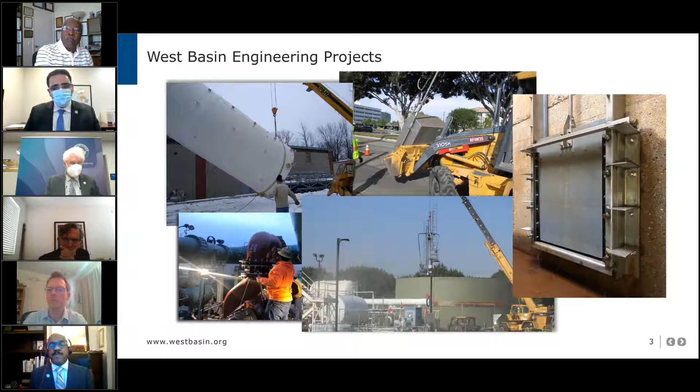Just to highlight and give recognition to some of the engineers here at West Basin, starting with our president of the board, Director Harold Williams. He's been an engineer in the Southern California area for well over 30 years. He's served various communities, is quite active in the professional engineering community, and also has a consultant engineering business at this time.

One of our newest members of the board is the chairman of this committee, Desi Alvarez. He has an impressive history - I've been fortunate to have worked with him in the past on some interagency boards we've worked on together. Mr. Alvarez not only graduated with honors as a civil engineer, but he did it twice, and he holds a degree in Masters of Engineering, as well as having a local consultant engineering firm.

Our executive manager of engineering and operations is Barkev. He also has a master's in engineering from Cal State Long Beach.

Myself, I've been in engineering quite a long time. I think it probably started when I got a note sent home from my elementary school to my parents saying I was daydreaming. I really wasn't daydreaming, but I was watching them build my middle school outside the window. So I've had a long standing interest in engineering and construction of that type.

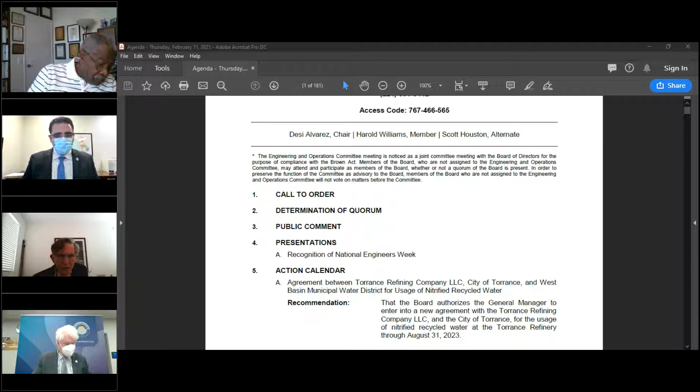Thank you. Okay, if there's no other comments on that, let's move on to the action calendar. For consideration today is the agreement between the Torrance Refinery, City of Torrance, and the West Basin Water District for usage of nitrified recycled water. So General Manager, who's going to be making that presentation? Will that be you?

Let me, Director Alvarez, Chairman Alvarez, let me introduce it, and then I'll have Barkev do a presentation. I believe we have a PowerPoint on this. So by way of background, this agreement is a three-way agreement between the Torrance Refinery, West Basin, and the City of Torrance, although the refinery and West Basin are the principal parties. It's for the provision of recycled water, nitrified water, we call it, which is recycled water with the ammonia removed that they use in their cooling towers. Our relationship and this agreement started way back in 1995 and expired last July, and it's been extended by the board through the end of this month to allow for negotiations for a new agreement.

I also mention we have another agreement with the Torrance Refinery and the city for the provision of boiler feed water, which is another type of recycled water, a different quality, a different spec for use, as the name implies, in the boilers. This one, though, is for the nitrified water, the nitrified recycled water.

What we're going to talk about today is we have two agreements, entered into at different times. All of the refineries we currently do business with, Marathon, Chevron, and Torrance, first trusted in the nitrified cooling tower water. That was the low-hanging fruit back in the 90s. After a few years, once they gained confidence in the quality and reliability, they moved to boiler feed. All three now get boiler feed water, which required a new separate plant built 2 to 4 years after the original nitrified agreements, depending on the refinery.

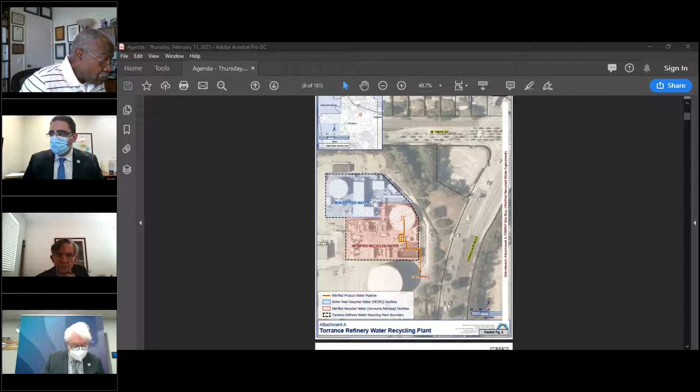This is what we call our Torrance satellite plant. It has two components, the nitrified water and the boiler feed. In the nitrified water agreement, the principles set back in 1994 mention there's a commodity and a fixed component. The fixed component was to pay for construction of this facility over 20 plus years, which expired, and they paid their last payment in July. The agreement, although not entirely clear, and that's why Steve, the attorneys, and myself have been looking at this, is that at the end of the agreement, the ownership of the infrastructure could inure over to the refinery since they already own the land.

And that's what we're going to be discussing. The next logical question is what would that mean for us? Let's say after mediation the ruling was that they did actually own the infrastructure. It would bring up further discussion about who and how it might be operated. I think nothing would change during the course of this agreement based on what I'm hearing from the Torrance Refinery folks, but maybe in a longer term agreement they might revisit the operation of that facility, or they might continue the way it's going today. So, hopefully that answers your question about ownership, what we're talking about is the infrastructure, not the land.

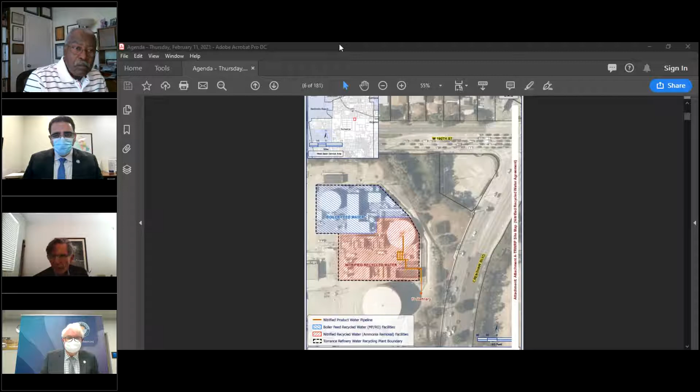For right now, I may follow up with you later. There's a couple of things you raised, but they're minor points. Just for clarification, 100% of the water treated here is used at the Torrance Refinery. We basically use this asset to produce water for the Torrance Refinery. Water produced at this plant is not used anywhere else in the system. Nowhere else. Okay.

I'd like to get a little more feedback on this full cost recovery. On the issue of the variable rate, just the raw rate for the water, I know we're going to charge on a 3-year rolling average. What is the current cost to produce the water? Not the average of the last 3 years, but what's the current cost? Well, the current cost is very close to what is in this agreement. The 2021 rate was based on the preceding 3 actuals.

I would say that's 18-19, 19-20, 17-18, 18-19, and 19-20, and those are actuals for power, labor, chemicals, maintenance, everything. By doing the 3-year rolling average, you have a fairly close figure to actual costs incurred, and that is used as the basis for setting the rate for the next year. Our current costs are very close, sometimes lower or a little higher, but it'll be very close to $1,000 an acre foot, unless there's a huge change in the cost of power or labor, which we don't see since we've been running this for quite some time.

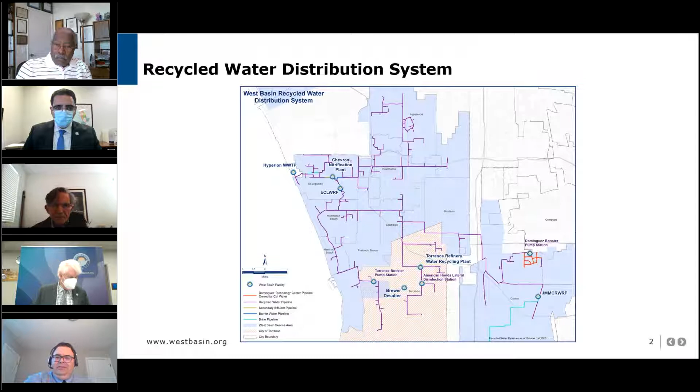If I can interrupt for a point of clarification - those pipelines you just mentioned are currently owned by Cal Water, is that correct? That's correct, Director. It's just that little red section referred to as the Dominguez Technology Center. So it's just the one on the southeast end? Yes, just those pipelines in red. So those are owned by Cal Water and would not be part of the operations or maintenance agreement. Cal Water would retain responsibility for the maintenance of them since they own them. That is correct. Okay, thank you. Go ahead, apologize for the interruption. Oh, no problem.

So continuing with the overview of the distribution system: overall, the district owns and operates 103 miles of pipelines. The majority of those pipelines convey tertiary treated, disinfected water. But I also want to highlight that the district owns pipelines which convey brine and secondary effluent - that's the 60-inch force main that supplies secondary water from Hyperion to the Edward C. Little Water Recycling Facility. We also have pipelines which convey barrier water, nitrified water, and single-pass and double-pass reverse osmosis water.

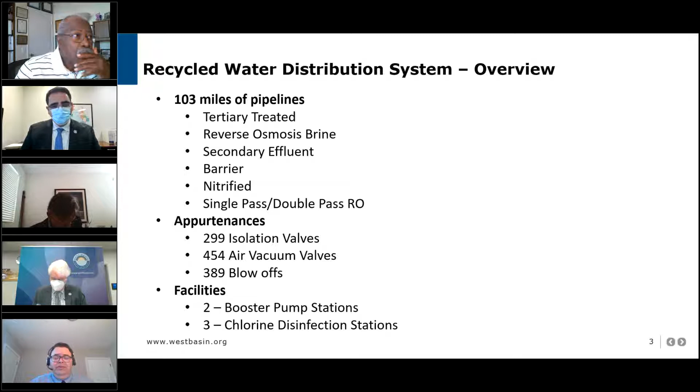We also have approximately 300 isolation valves and 454 air vacuum valves. Air vacuum valves are mechanical devices connected to the high points of the distribution system, used to release accumulated air at those high points and to allow air back into the system if there's a sudden change in pressure. In addition, we have 389 blow-offs, located at the ends of the system and at low points, to flush or drain water if needed. As highlighted in the map, the district also has 2 booster pump stations and 3 chlorine disinfection stations, 2 of which are located at the booster pump stations.

So I just wanted to first go through the distribution system now. I'd like to provide a brief overview of the scope of work, which is attached as part of this memo. The scope of work is what potential contractors would use to identify the work we're requesting as part of this solicitation, and that would be attached to the overall request for proposals. I've divided the operations and maintenance into basic services and emergency services to summarize the overall scope of work.

Under basic services, we would request the contractors to provide distribution surveillance. So we would want an operator, on a scheduled basis, to go throughout the distribution system and check for leaks or identify if there's any damaged or missing equipment throughout the distribution system.

We would also want them to conduct water quality sampling on a scheduled basis. We have 30 different locations throughout the distribution system that we currently collect water samples at.

We would also want the contractor to operate and maintain the appurtenances that I had mentioned. For example, the isolation valves, we would want exercised, which entails opening and closing valves to extend the life of those valves and ensure they work when needed. There's also maintenance associated with air vacuum valves as well as the blow-offs. Of course, we would need operations and maintenance support for the pump and disinfection stations that I highlighted before.

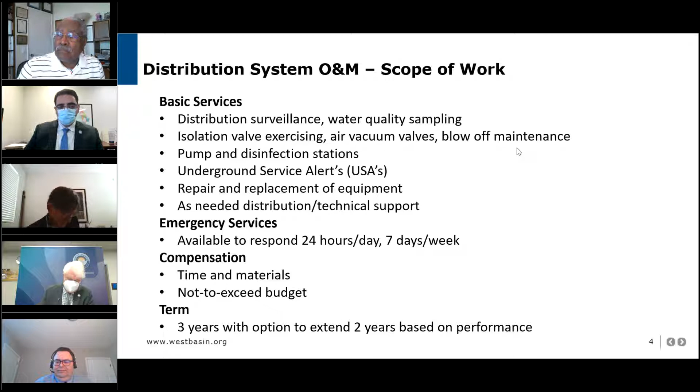Okay, I guess this is just some generic questions for the general manager. There are some fairly straightforward items in the scope of work, and I was just wondering - maybe we've got an operations department and operations staff, you might want to comment. We have a very limited number of meters.

Why can't some of those activities not be done by our operations department? So the specific question, Chairman Alvarez, is that we have a limited number of meters. When we say a limited number of meters, why can that not be done by our own staff in terms of the calibration?

First, before I go back to Frank on this - for instance, our main mag meter going to DWP, any calibration for that, I'm sure, is outsourced to a company that specializes in calibration of meters that size. And on the other ones, I assume you're talking, Chairman Alvarez, about calibration or more than just calibration of the meters?

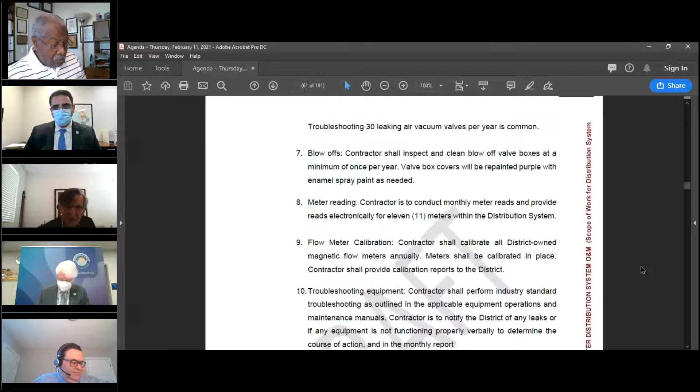Well, on page 81, meter readings - there are only 11 meters. Reading meters is pretty straightforward. I'm just, at some point, if you're looking at just kind of metrics and so on, and maybe it's a greater point, but we've got an operations staff, and some of these things are stuff that maybe our staff should be doing.

The meter calibration, that's contracted out, and there are people who just come in and calibrate meters when that's needed. But things like meter readings, water quality sampling - those kinds of activities might be something that we should be looking at our staff to do.

Okay, so what we can do for that, Chairman Alvarez, is Frank, you don't have to get this right now, but how many meter reads are we talking and how frequently? I assume they're all monthly. And then the other part of this, the same with the water sampling. I think you have a matrix for this. How often and where are they at in terms of sampling, and where are these reads at in terms of distance? What's involved in that time-wise, and then delivering the samples to where they're to be analyzed, or some of them are field analyzed, I take it too, for chlorine residual. So unless you have it off the top of your head, can you just comment?

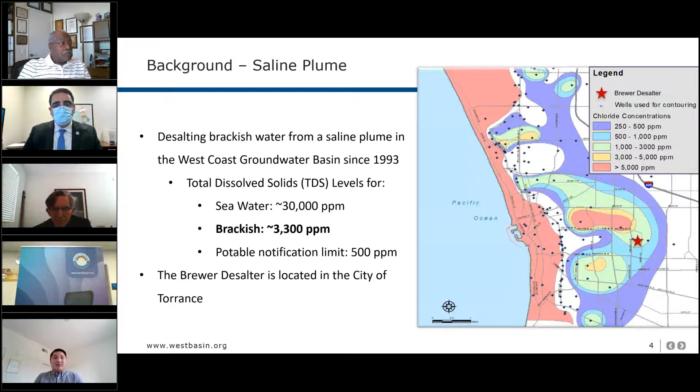We're currently granted pumping rights up to 2,000 acre feet per year by the LA County Superior Court back in 1992, and that's about 1.78 million gallons per day. Back in 1986, there was a large drought, and Metropolitan ordered its member agencies to really reduce consumption of imported water. West Basin was expected to reduce supplemental or imported water deliveries by 20% to meet this reduction.

So the district instituted a broad water conservation program, including new water development. This demonstration project was a major component of the district's program, resulting from several studies commissioned by West Basin which identified underutilized local sources of water supply. That was back in 1986.

Operation began 27 years ago, almost 28, in July 1993 as a 5-year pilot program, as Patrick previously mentioned, to evaluate this desalting technology. We're currently operated by California Water Service. As mentioned, it's brackish water desalted with reverse osmosis technology and blended with another potable water source in that 5 million gallon storage tank to the right. Since 2002, we've removed about 48,000 tons of salt - quite a lot.

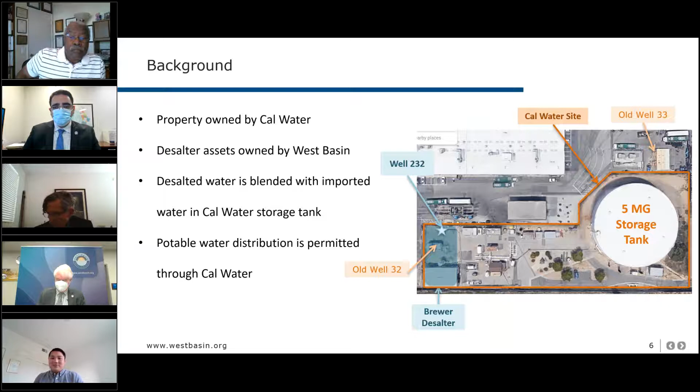Let's go into a little chronological background. Going back to 1993, we originally had 2 wells belonging to Cal Water, located on the left of the map, Old Well 32, and another on the top right, Old Well 33. That was 2 wells with a combined capacity of 1,250 gallons per minute.

In 2005, we constructed Well 232, the light blue star in the shaded rectangle, to replace the 2 existing wells, at a capacity of 1,250 to 1,500 GPM. In 2014, we replaced the stage 1 and stage 2 reverse osmosis membranes, about 252 membranes in total. After that, the well capacity was reduced due to the health of the well.

That triggered a well assessment, completed in 2016, which identified that a mechanical and chemical rehabilitation of the well was needed. That was completed in 2019, along with upgrading the well motor and pump to a 1,400 GPM capacity. More recently, in 2020, we replaced 84 membranes, about 33% of the total number, of stage 2 reverse osmosis membranes.

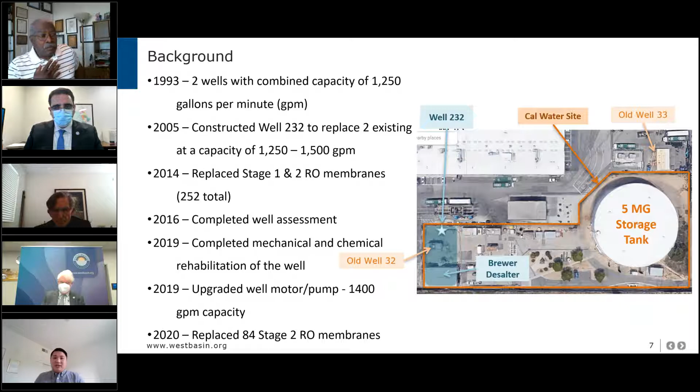With the early drought that I mentioned, the region needed to develop other local water resources besides just recycled water. So in 1991, Metropolitan conducted the Brackish Groundwater Reclamation Study, which identified significant amounts of degraded groundwater in the region that were not being used. Metropolitan established a program known as the Groundwater Recovery Program, GRP, to encourage agencies by providing financial incentives for treatment of degraded groundwater for potable purposes.

The purpose of the GRP was to improve water supply reliability through treating unusable degraded groundwater, and to increase groundwater storage for regional benefit. Metropolitan provided a $250 per acre foot credit as part of their GRP program to offset the cost of operation and maintenance, which Patrick has mentioned previously.

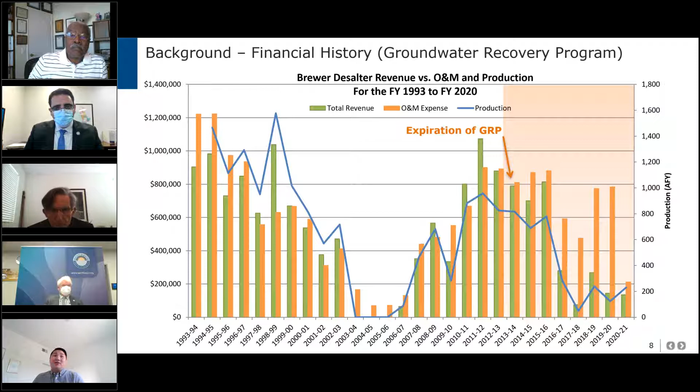Unfortunately, in 2013, that GRP expired. That's shown right there as the arrow, in May 2013. With the expiration of the GRP, it really magnifies the approach taken to create a sustainable operation point for the district. So let's move on to some of the assumptions we've taken for our future analysis.

Breaking down what exactly goes into consideration: we have expenses in orange, we have revenues in green. Under expenses, we have our replenishment assessment, which is an assessment paid to WRD on every acre foot that we pump out of the ground. And of course we have our operations and maintenance costs, which we'll outline in further slides.

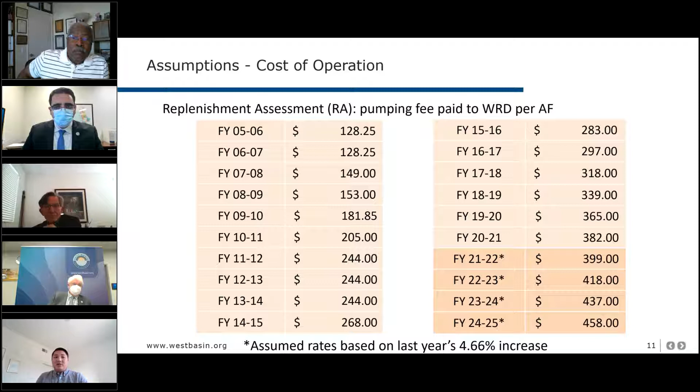Let's jump into just the RA. This shows our historical numbers, how much the RA has cost in the past, from about 15 years ago in 2005-2006, when it started at $128 per acre foot, and today it's $382 per acre foot. Again, it's a pumping fee paid to WRD on every acre foot we pump out of the ground. We've taken those numbers and projected them toward future years. The ones shaded darker orange are assumed numbers based on last year's 4.66% increase.

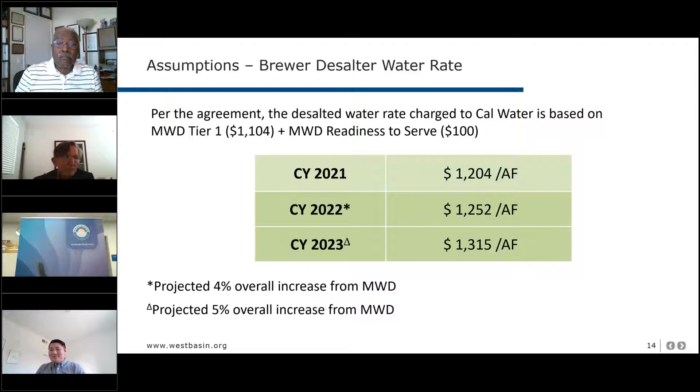I realize it's a lot of numbers, so we'll break it down a little bit more. Before we get there, we'll cover a little bit more about the capital costs and grant funding that Patrick previously mentioned, since there are multiple different projects. I wanted to cover how the facility actually works and what these projects might be related to, so you have a reference point to where these improvements are proposed.

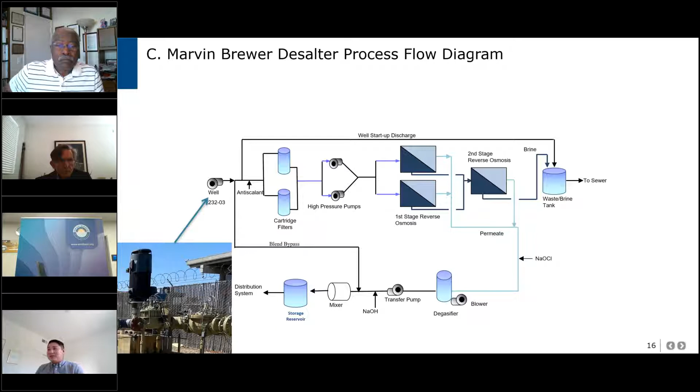This is our process flow diagram for the facility. We'll start at the well and move clockwise around it. The well is shown on the bottom left, and we pump water out, add a little anti-scalant, and pass it through a pair of cartridge filters to remove suspended material. Then the water gets pumped through reverse osmosis units via high pressure pumps on the top left, which remove dissolved solids including salts. The water then goes through the degasifier to remove carbon dioxide and gets injected with sodium hydroxide to increase the pH, and is ultimately stored in Cal Water's reservoir and mixed with potable water, which is then provided to West Torrance as drinking water. That's a quick overview of our facility.

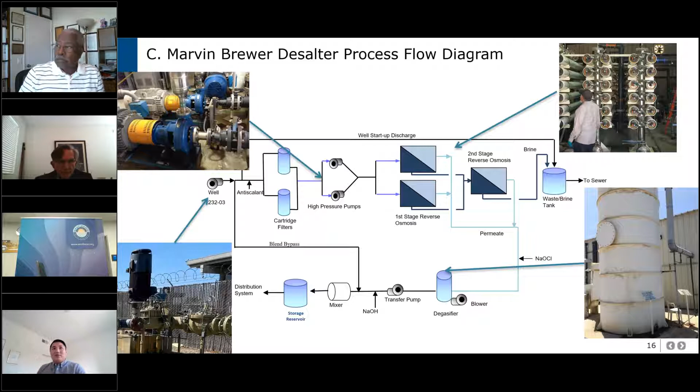Now covering the proposed capital costs, or estimated costs for facility improvements, we've broken it down into three different sections. On top, completed improvements, which was completed in 2019 for the well rehabilitation at a cost of $1.1 million. We've broken down the other two, which are near-term estimated costs for facility improvements and long-term estimated costs for expansion. I'll go into more detail in further slides on what exactly each project is and why it pertains to this facility.

We separated them into three different tables for the future alternatives, which you'll see make more sense later. The total estimated improvement costs identified in the 2015 condition assessment from Carollo is about $9.7 million. As Patrick previously mentioned, we have approved grant funding for about 50%, up to $4.733 million.

Before we get into that, let's look at some of the grant funding. The grant funding is from the Department of Water Resources as part of their Proposition 1 grant funding for the Water Desalination Grant Program. We applied for the grant in March 2018, and we were awarded the grant in October 2019. This grant covers planning, design, and construction of potable water desalination facilities for ocean and brackish water.

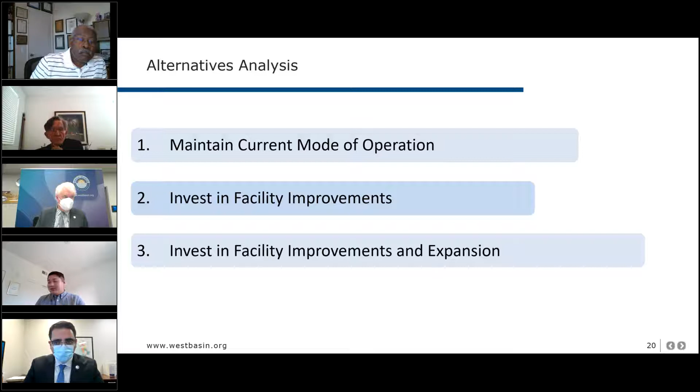Now that we've covered everything that goes into the analysis, let's look at some of the alternatives. We'll lay them out in three different alternatives: alternative 1, maintain the current mode of operation; alternative 2, invest in facility improvements; and alternative 3, invest in facility improvements and expansion. We'll look at all three of these alternatives with grant funding on the side as well, so with or without grant funding. So, alternative 1...

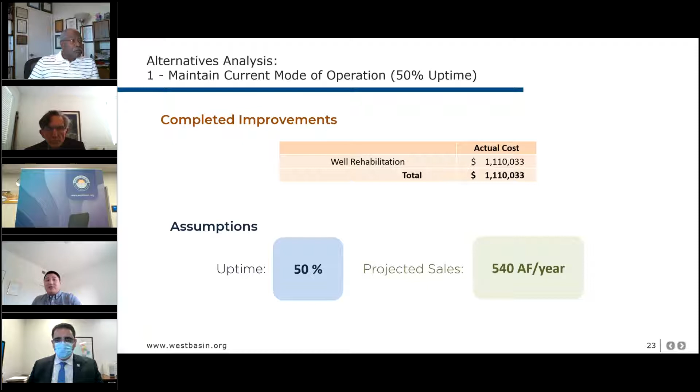And so that's alternative number 1. We've also taken a look at alternative 1B, an uptime that more reflects how we're doing in the last 6 to 8 months. That uptime has been closer to 50%, not so much the 80, due to some unexpected failures in equipment. With that 50% uptime, our projected sales drop to 540 acre feet per year.

So to sum up alternative 1, the pros are that we continue to clean up the saline plume, we continue reducing our reliance on imported water, and there are no major capital investments needed. On the cons, the cost of service is not fully recovered, as you saw in the previous tables, and the reliability and uptime is reduced.

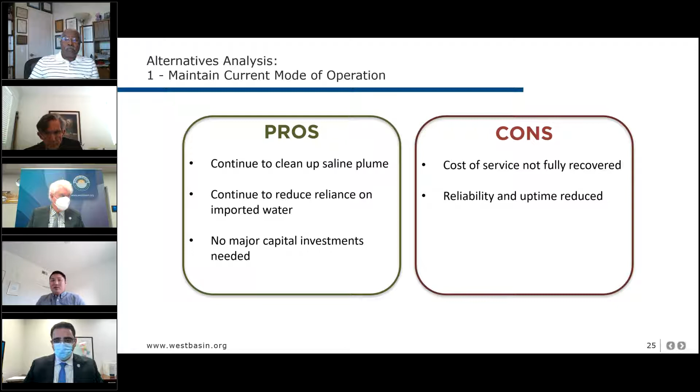That includes plant-wide noise reduction, interstage booster pump addition to help our recovery in the second stage and boost up pressure, a new degasifier and carbon dioxide scrubber package system, and miscellaneous site and system improvements, including a well pump shelter. As you saw in the picture, our well is currently sitting outside uncovered. There are also safety upgrades, including upgrading fans in the building for better hydrogen sulfide removal, a permanent chlorine tank location (right now it's temporary), outdoor lighting in the well area, and replacing our sump pump that transfers waste from the plant to the brine tank.

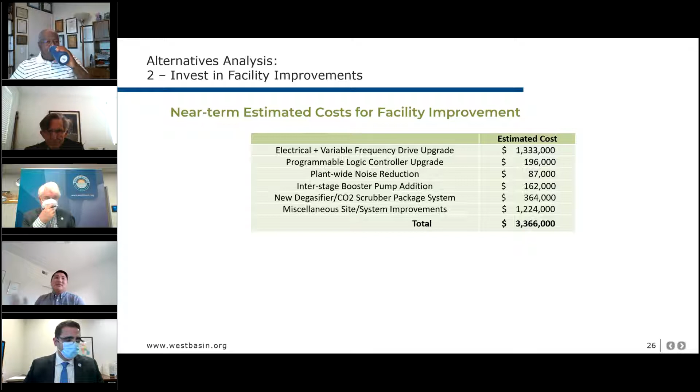The assumptions for alternative 2 include an increased uptime of 85%. We have new equipment coming in, so we anticipate a higher uptime, with projected sales up to 1,047 acre-feet per year.

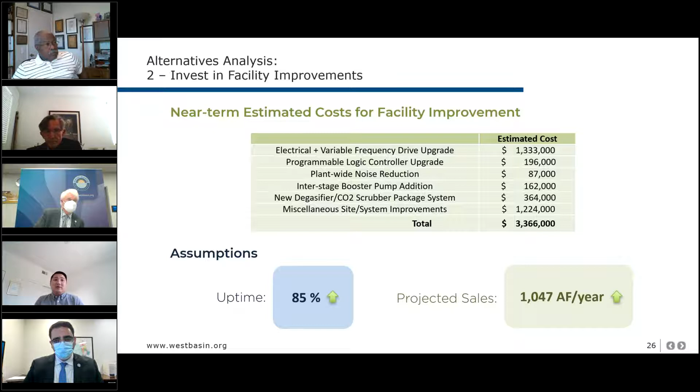The pros of alternative 2 are improved system reliability, reduced downtime, and we will continue to clean up the saline plume and reduce reliance on imported water. But on the con side, there's no added redundancy with these improvements.

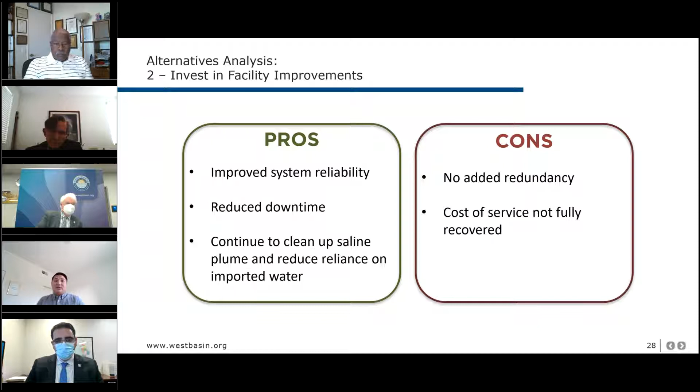It's best to keep in mind that this plant was originally designed as a 5-year pilot, so not a lot of redundancy was built into the facility. Also, the cost of service is not fully recovered, as you saw in the numbers in the table.

So alternative 3: invest in facility improvements and expansion. We have the same near-term costs from alternative 2 included, and we've also added the long-term estimated cost for facility expansion. This includes everything from previously, kind of an all-in-one package, and includes the well rehabilitation costs.

So for long-term costs for facility expansion, we have included drilling and installing a new well, as well as a pump and motor to go along with it, and adding in a second reverse osmosis train, bringing up our capacity to 1 million gallons per day. And that totals up to the 9.7 that we saw earlier.

For assumptions with this one, we've increased our percentage to 90%. Now we have some redundancy in place, and we've also built in some of that scheduled downtime and the cleaning and sampling. Sales definitely increased as well, since we're on most of the time with more additional capacity and redundancy, bringing us up to almost 2,300 acre-feet per year. This assumes a revised capacity from the original 1992 court exempt water rights.

Previously, or currently, we have 2,000 acre-feet capacity. This would require us to return back to the LA Superior Court and request a 2,655 acre-feet per year capacity.

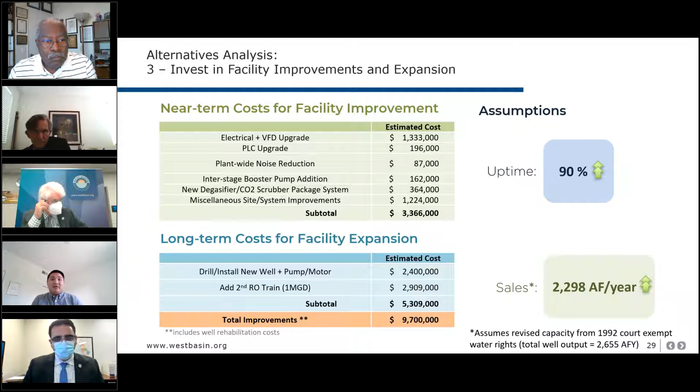So the pros for alternative 3: we increased salt removal from the saline plume, we have increased production, and further reduced reliance on imported water. The con is that it's the highest capital investment required, and the cost of service is not fully recovered.

I'll pass it on to Barkev to go over the potential next steps, to outline and summarize the presentation.

Thank you, Jason. Going on to the next slide. Again, like Jason said, we're bringing this to the board for consideration. Take a look at the dollar amounts, the economic analysis that Jason put together here. In looking at what could be the next potential steps, it's important for us to take a look at what the dollars are saying, what the data is telling us.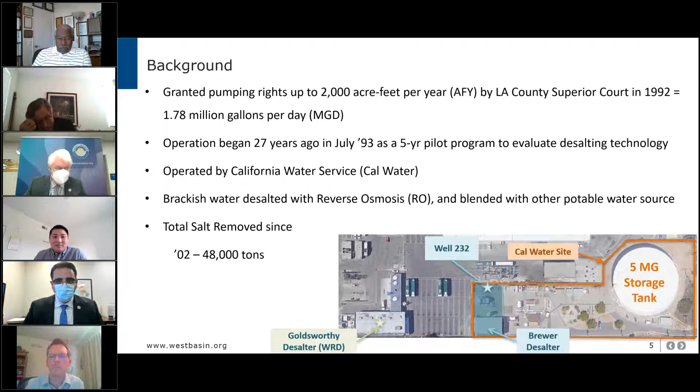Yeah, I'll answer that question, Director Houston, and some of your other comments. So the grant is not executed. It was applied for several years ago, but it's coming up to the point where we have to make a decision. The grantor DWR is wondering, are we going to proceed with this grant or not? But to your question, no, we are not bound to this grant until it's executed.

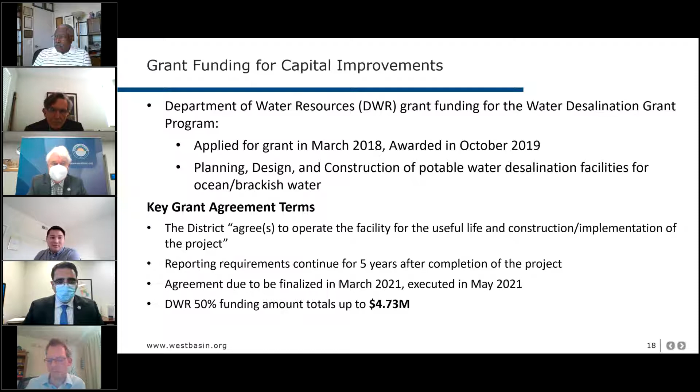Executing the grant obliges you to continue operation for a given period. You can't just get the grant and say, I've changed my mind. Right, okay, so that's been running for a few years.

That's one consideration. But just directly to your question, no, we're not obliged, but we're probably at a point where we need to tell the DWR, because we do very, very well in the grant arena with number of parties, to make sure our reputation is good, that if we're not going to use it, we've decided.

Let me just interrupt and move forward, because that was my number one thing: I'm really concerned that if we move forward and accept this grant, then we're stuck with that back end obligation. So, just on the very outside looking in, every option you presented, we lose money. Every option doesn't make any sense for us.

And this is a small piece of what we do. So I don't quite frankly understand how we could justify that to our ratepayers. So for what it's worth, in my mind, I would want to cut my losses and just move on, and it is what it is.